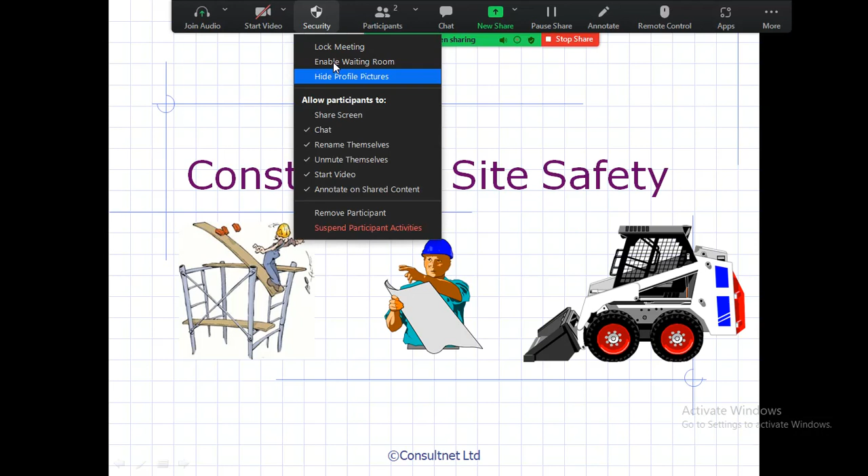Main safety in civil engineering: the civil engineering industry is one of the biggest industries of modern times. It is also an industry where extensive use of labor is required, and wherever such large amounts of human labor are involved, a matter of safety arises.

In India, safety in construction is not treated as a serious issue and is often neglected. For proper development and growth of the economy, apart from rapid industrialization, a stable and productive workforce is a must. To build a productive workforce, it is essential that management strive to meet the workers' social, physiological, and welfare needs, and take steps to humanize the work and work environment.

The main part of construction site safety: what is safety. Safety is a difficult term to define due to the relatedness of several factors. Very often safety is adjudged in terms of an inverse relationship with accident rate, meaning a high accident rate means low safety, and vice versa.

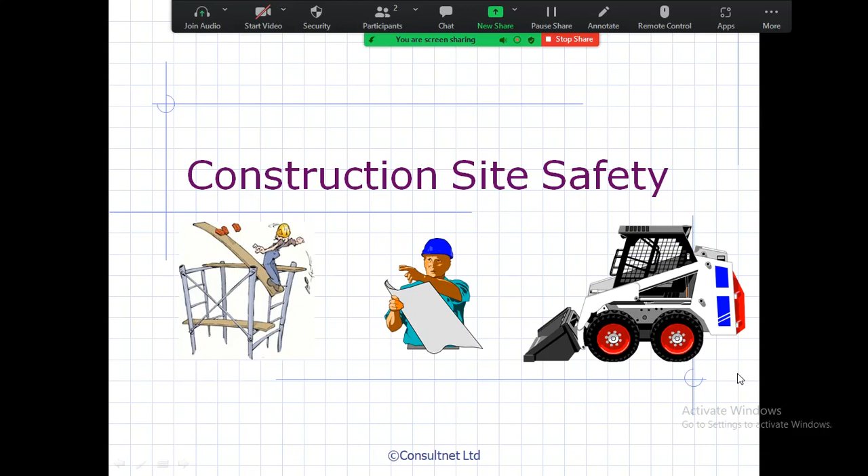Main part for construction site safety: first, introduction with a few facts; second, construction accidents; and third, safe access on site, working at height, and ladder safety.

Then roof safety, excavation work and crane safety, traffic and vehicles, plant goods, first aid, electricity, working near sewage, and PPE safety.

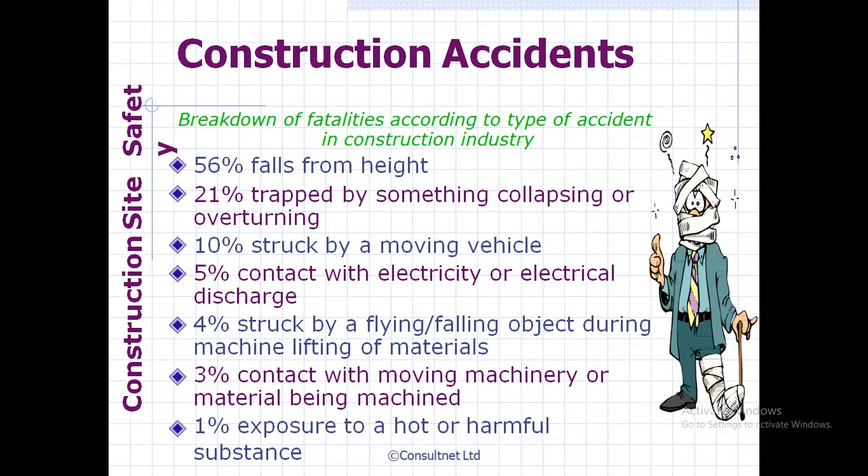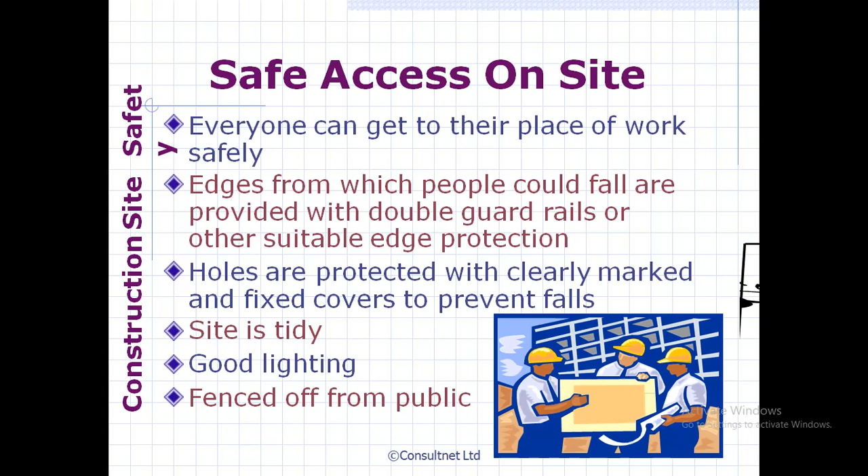A main part of safety is that working at height is hazardous on the construction site. Holes in floors, gaps on working platforms, shafts and stairwells not adequately covered, barricaded or fenced off, and using ladders or scaffolding without fixing them properly is dangerous. Never use incomplete scaffolding; make sure there are handrails and toe boards at all edges. Wear your helmet, and before starting work at height, check the area is clear of any overhead power lines.

Human causes include lack of knowledge, lack of interest in the work, other personal factors, lack of skill, and careless supervision. Also faulty working practices, improper use of materials, striking against objects, no use of protective equipment, poor site layout, and improper storage of material.

Structural failures mean failure of foundation due to faulty design or natural climate conditions. The effect of an accident is loss of life, loss of time, and escalation of project cost.

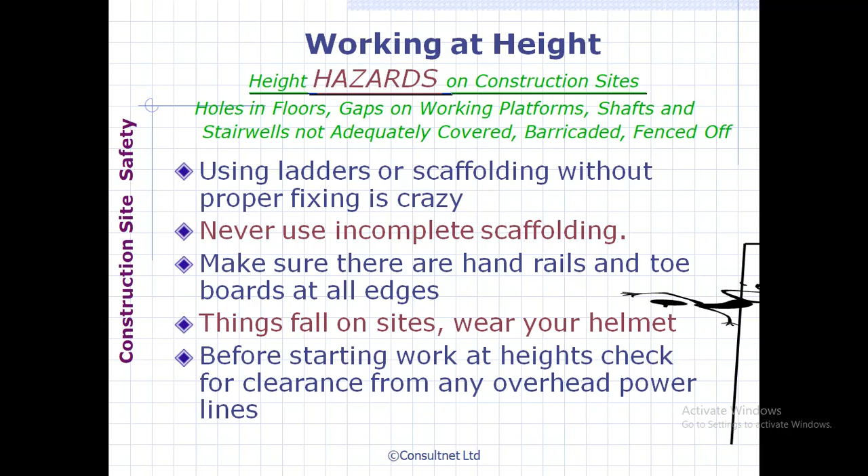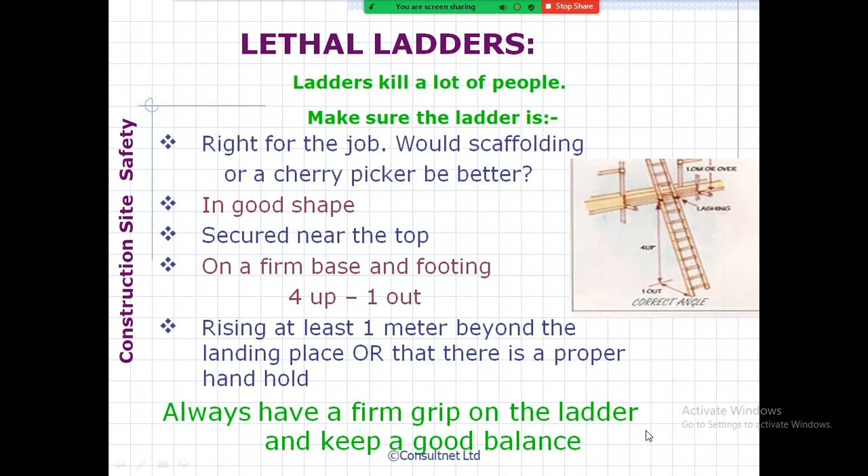Ladders kill a lot of people. Make sure the ladder is right for the job, or consider scaffolding or a cherry picker instead. Use the correct angle, make sure the ladder is in good shape, secure it near the top, and ensure a firm base and footing with a ratio of 4 up to 1, meaning it rises at least 1 meter beyond the landing point. Always have a firm grip on the ladder and keep good balance.

Never allow more than one person on a ladder. Use a tool belt and hand lines to carry objects. This is safe; do not lean out from the ladder in any direction. If you have a fear of heights, don't climb a ladder, and do not allow others to work underneath a ladder that is in use.

The roof is a risky place to be. Always inspect a roof before you walk on it. You must have protection to stop you from falling off the edge, and use a proper safety harness and running cable when working on a roof. Remember to walk along the joists, as 50% of fatal injuries involving roofs are falls through fragile material, and 30% are falls from edges and openings.

This covers the safety rules for designers and safety officers. The main safety rule for designers is that in the development of a project, a significant role is played initially by the designer, and then by the construction contractor.

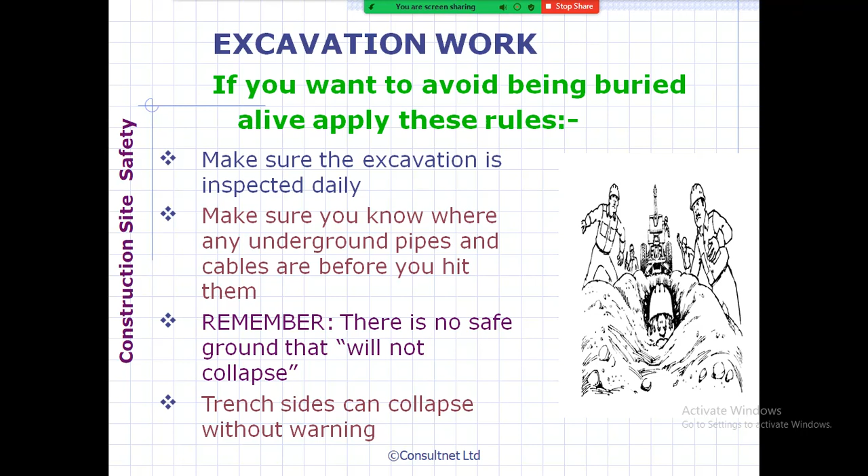For excavation work, to avoid being buried, make sure the excavation is inspected daily. Make sure you know where any cables are before you hit them, and remember there is no safe ground that will not collapse. Trench sides can collapse without warning.

Safety is very important in the civil engineering industry, but safety skills in the construction industry, especially in India, are very poor, resulting in many casualties which hamper the normal working of a project. A safe working environment can be easily achieved through proper interaction between the contractor, designer, and labor. The constitution can also play its part in maintaining proper habitable conditions for workers and ensuring safety by being strict on those who do not follow the rules, penalizing them accordingly.

Unless all these factors work together, accidents will keep occurring and safety will be compromised. Crane safety is simple: the weight of the load must be carefully estimated, and the crane must be fitted with an automatic safe load indicator to warn workers. The crane must always work on a hard level base. The load must be properly fixed and secured. The banksman must be trained to give clear signals. Never walk under a suspended load.

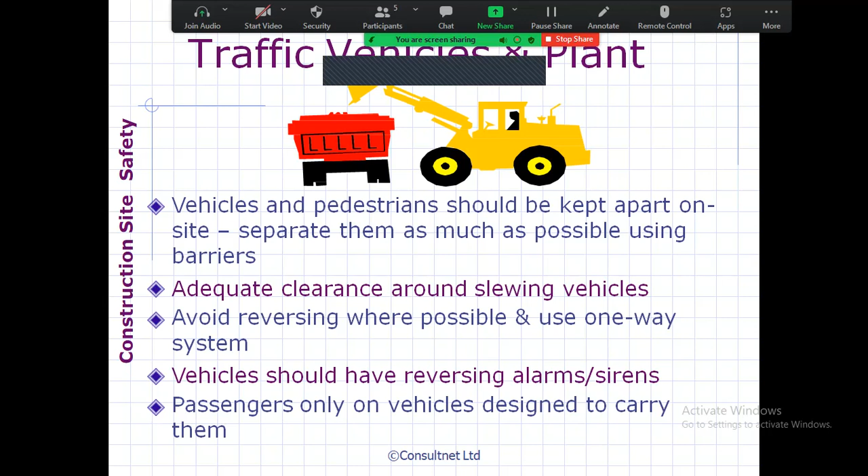There are two types: unsafe acts and unsafe conditions. Unsafe conditions include rough, sharp or slippery work surfaces, defective equipment, overloaded tools and equipment, improper clothing, and defective ladders and scaffolding. Unsafe acts mean not wearing helmets or safety glasses, working while intoxicated, working with insufficient sleep, failure to use safety belts, harnesses and safety nets, and using hands instead of hand tools.

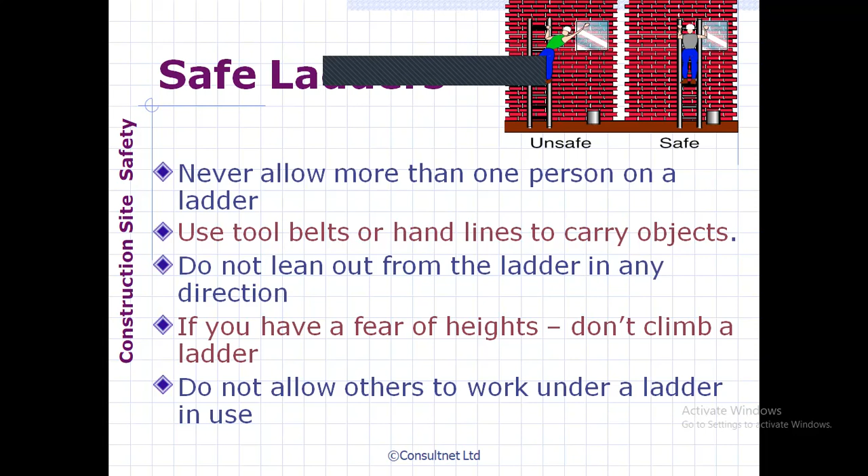Last point: traffic, vehicles and plant. Vehicles and pedestrians should be kept apart, separated as much as possible using barriers. There should be adequate clearance around slewing vehicles, meaning avoid reversing where possible and use a one-way system. Vehicles should have reversing alarms and sirens. Passengers only on vehicles designed to carry them. In the construction sector, construction is the most dangerous land-based work sector.

The problem is not that the hazards and risks are unknown, it's that they are very difficult to control in a constantly changing work environment. So every year many people fall victim to injury, harm, and even death through accidents on site.

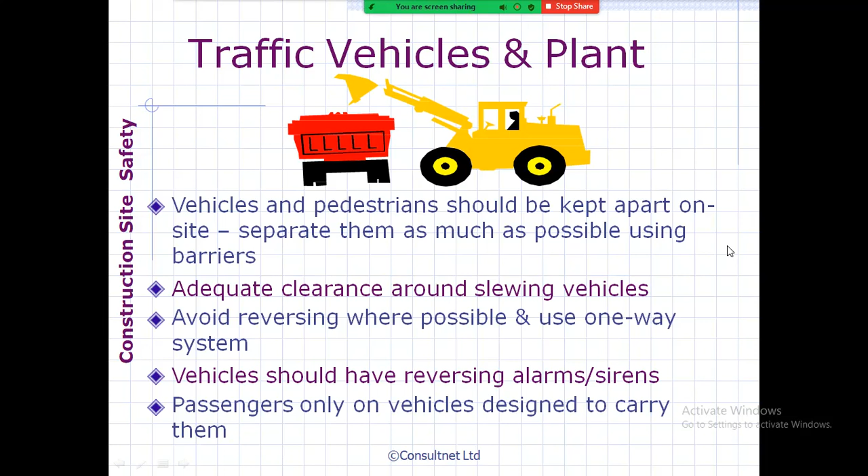Goods hoist practice means good safety practice: installed by a competent person, rated capacity clearly marked with current examination and inspection reports, a suitable base and enclosure to prevent people being struck by moving parts of the hoist, and landing gates kept shut except when a platform is at the landing.

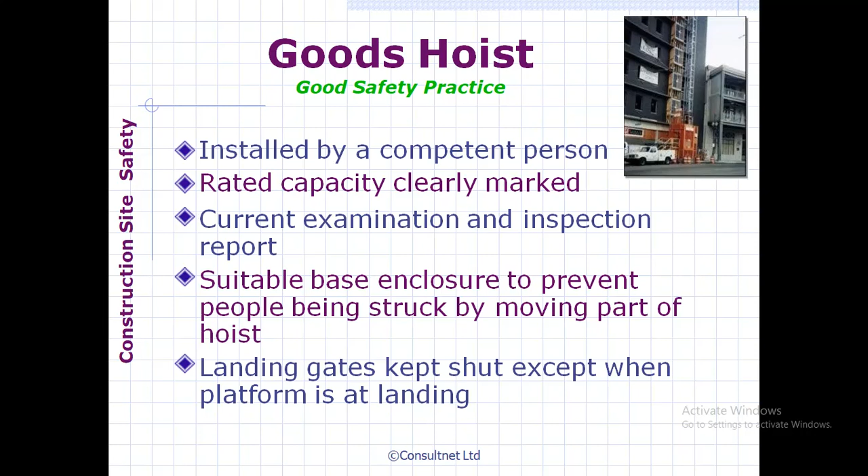Good practice with electricity on site means treating electricity with respect: check constantly that cables are not damaged or worn, keep trailing cables off the ground and away from water, and never overload or use makeshift plugs and fuses.

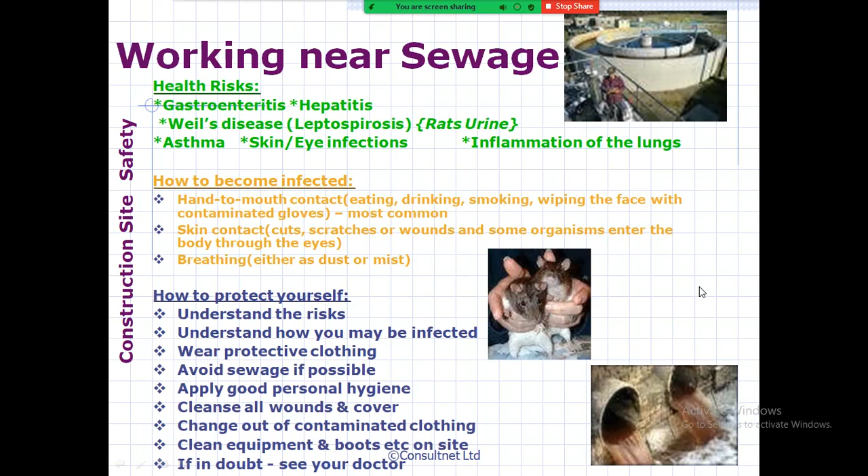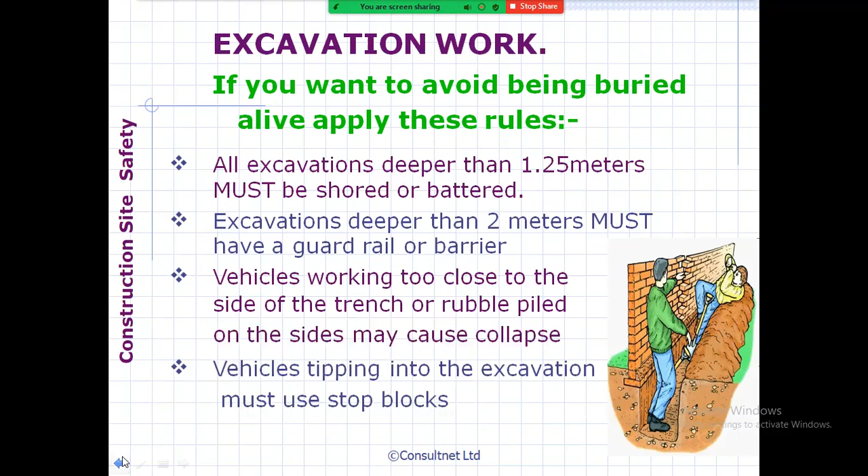Okay. Well, main part. Hmm.

The main importance of construction safety is protecting life and property, proper management of construction work, saving total construction cost, reducing worker compensation claims, increasing productivity, improving employee morale and satisfaction, and reducing insurance cost. Safety conditions apply to any area of construction activity.

Building construction preventive measures mean the employer should have site safety plans addressing potential hazards which could lead to injury or death, ensure roof openings are not left unprotected, unguarded or uncovered, equip all workers on the roof with fall protection such as a retractable lanyard that would allow the worker to do his job while still having fall protection, and require that all hazards on the site are communicated on an ongoing basis to all workers in the area.